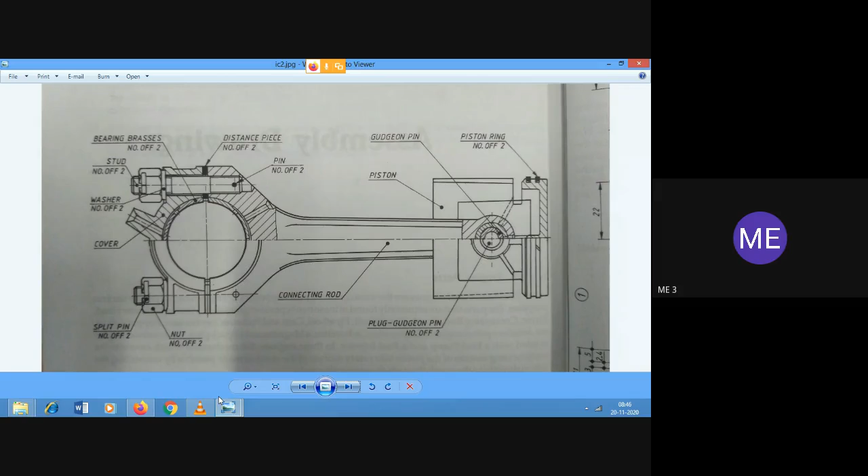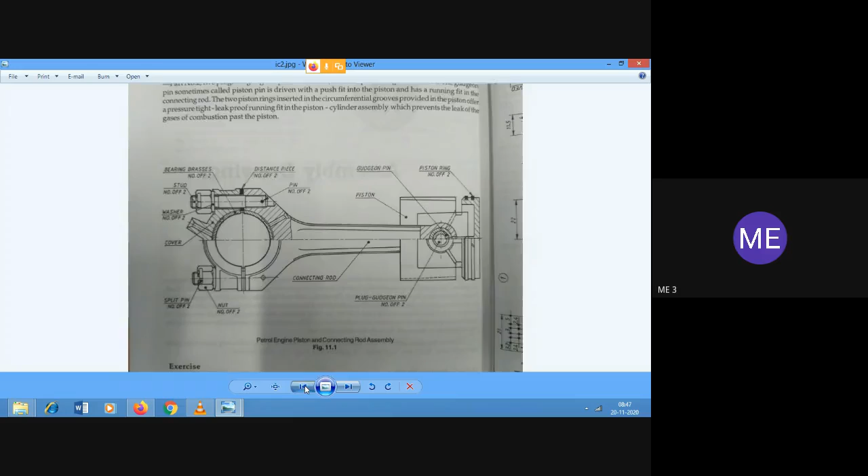So we have to make this entire assembly of the connecting rod. Now we'll see the parts and their details. These part details will be given even in the exam. And as I've already told several times, they will never give how the assembly will look. In the Part C question, the assembly drawing question, the assembled view will never be given. They will only give the details of the parts, with the bill of materials.

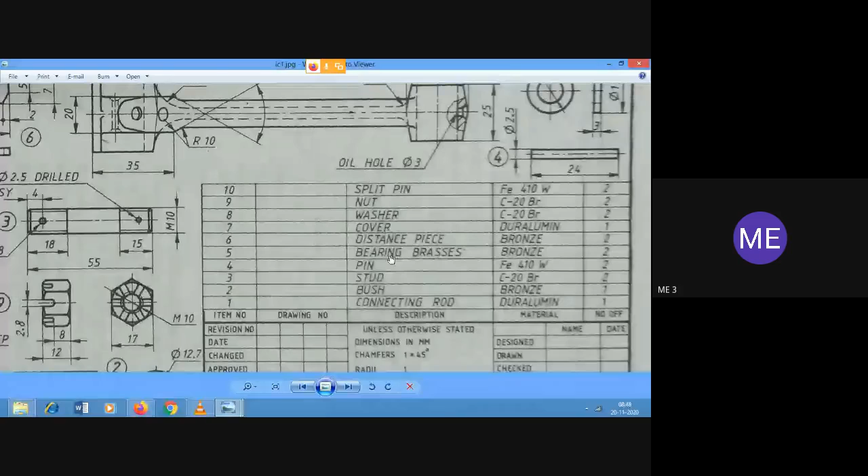Now we have a total of 10 parts here: connecting rod, bush, stud, pin, bearing brasses, then the distance piece, which fills the gap between the connecting rod and the cover, then the cover, washer, nut, split pin. The material is given in the next column, and in the last column, the number of pieces required for one assembly. So one connecting rod, one bush, two studs, two pins, two bearing brasses, and so on.

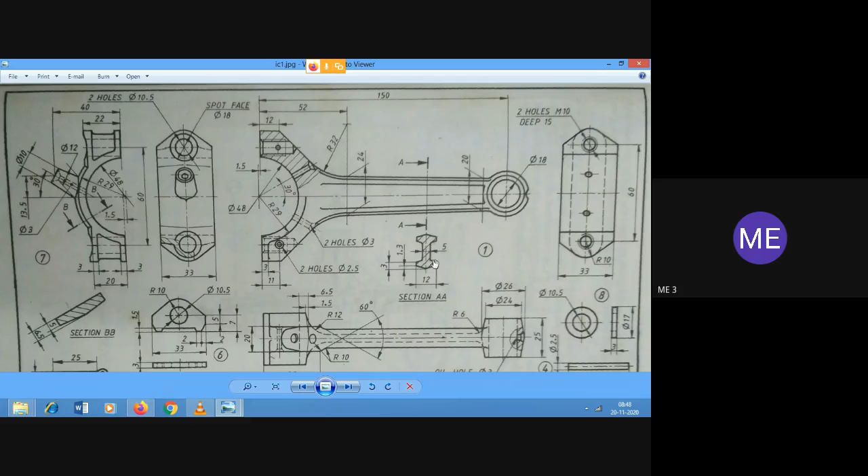So here we have the connecting rod, part number one, whose front view, sectional view and top view are given. And we have the cover on the left side, part number 7. The other part details are also given. So we'll see one by one today how to do these drawings.

Yeah. Okay. Just a second.

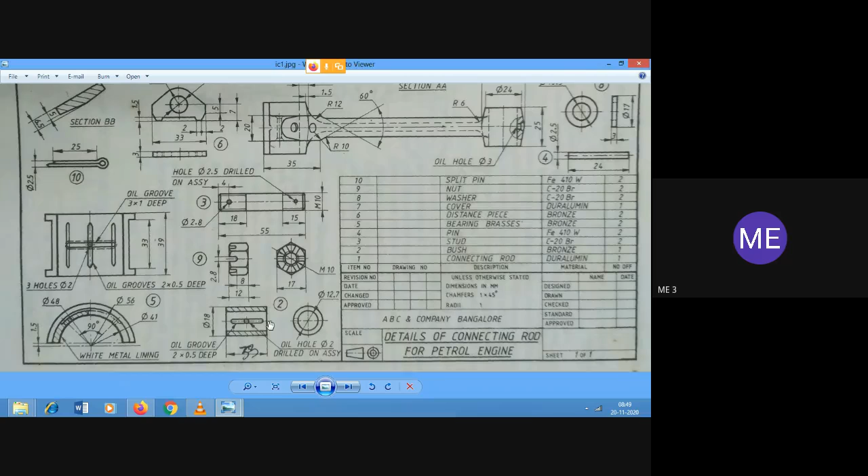Okay. So here, part number 2 is the bush. They have given a sectional view of it, with hatching on both sides. The outermost edges are indicated with diameter 18, so it's circular, and we can see some thickness for this bush. The side view is given on its right side, with inner diameter 12.7.

On the circumference there's an oil hole of diameter 2, and a groove of 2 by 0.5 deep. The overall length of this bush is 33 mm. So we will see that. Okay. Yes. Select the plane. It's better that you go with the front view plane.

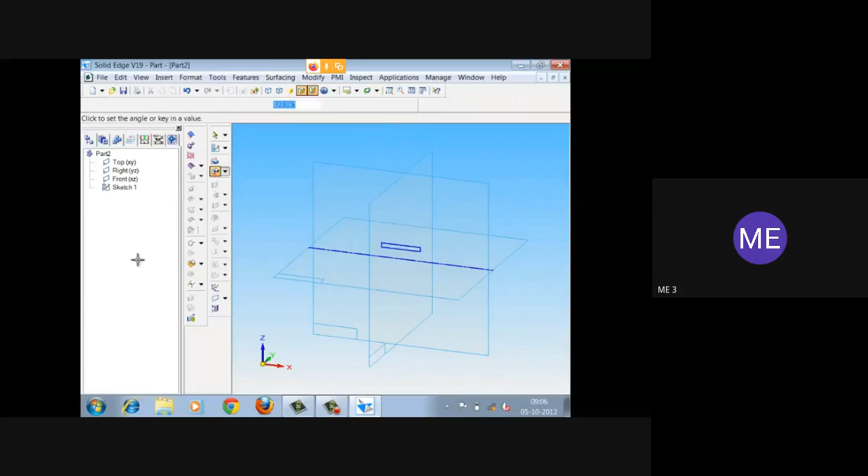So trim the unwanted lines. Now, if you look at this, the lower line has got this total distance of diameter, which was how much? 30, no, 12.7, if I'm correct. So that's the inner diameter, and over here the above line is the outer diameter. Yeah. Yes. Revolved protrusion. So we need it completely cylindrical in shape.

Right? Now we'll go for one more thing, a plane that we'll be drawing parallel to this plane of selection, that is the front view plane, because we need to give a groove onto this cylindrical surface. In one of the assembly drawings in the previous classes, I had mentioned how to do this, right? Because there also we need to use this parallel plane or offset plane, because we cannot do any kind of drawings or cutting or protrusions from a cylindrical surface directly. Okay, we have to make use of a plane.

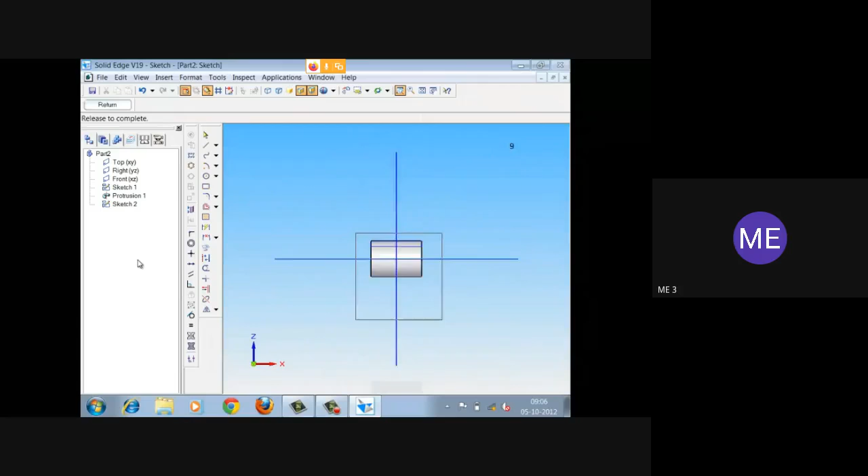So we'll keep it at 9 mm distance because the total diameter is 18 mm. So radius is 9 mm, right? So once I place a plane from here at a distance of 9 mm, then I'm at the circumference. Okay. Right. So they had given a groove of 2 mm width and 0.5 mm. Okay. 2 mm width and 0.5 mm.

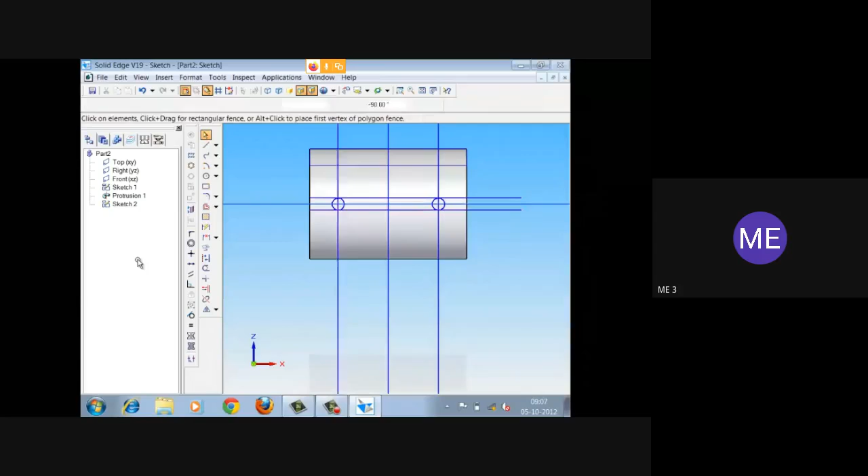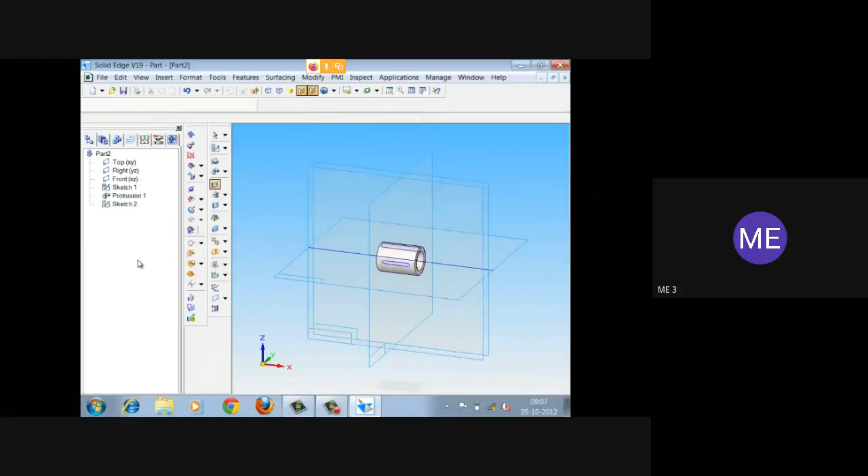So trim the unwanted lines so that we get the oil groove shape. Okay, this particular shape is what we need, and we have to go for cutout for 0.5 mm. Cutout. Select the sketch. 0.5 mm, which they have clearly given in the drawing.

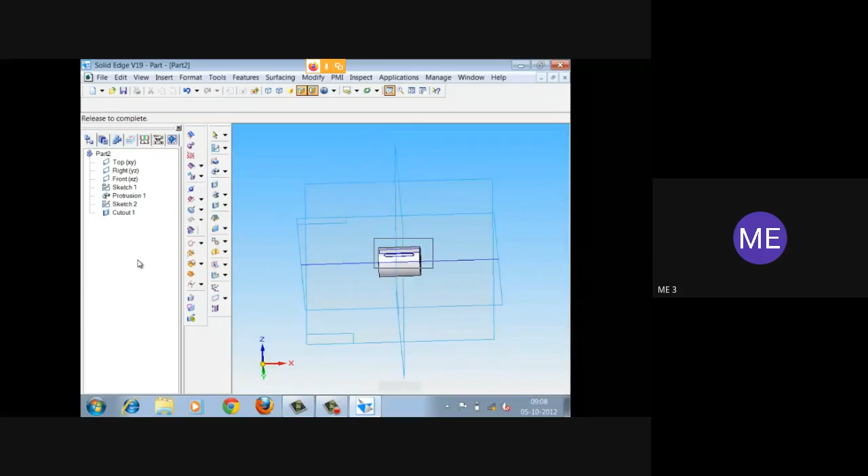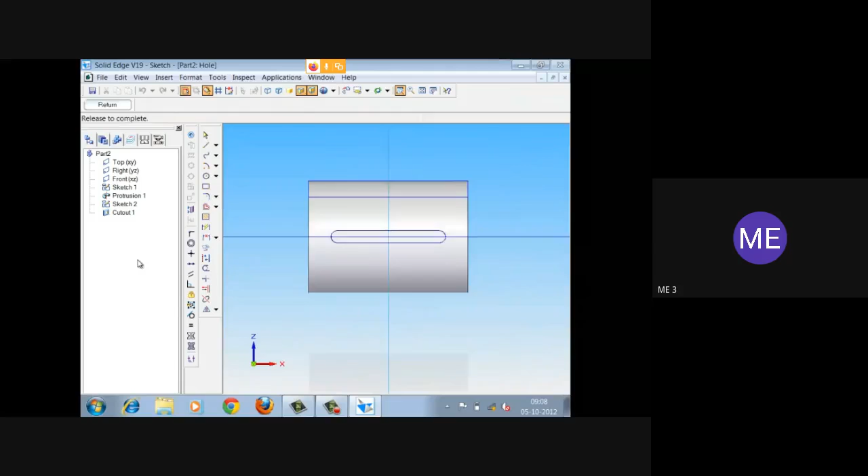We have to create a hole. Go for parallel plane. Have the plane once again at that same offset plane at 9 mm distance. It's a circular hole of 2 mm diameter. Save this drawing. Yeah.

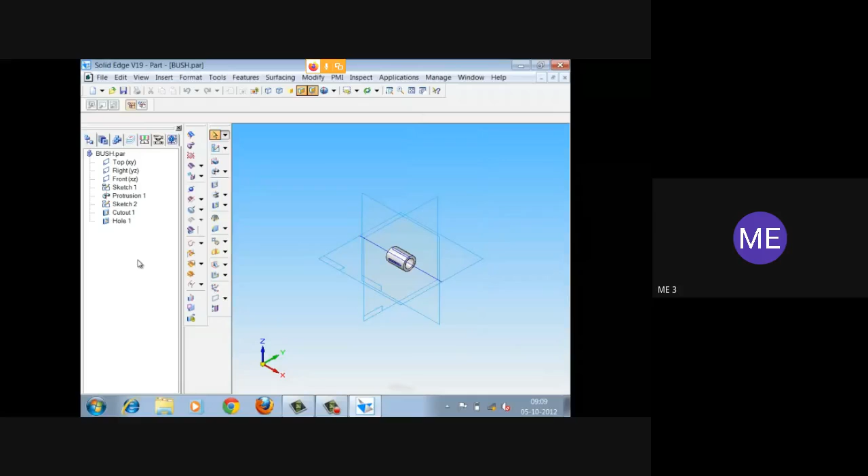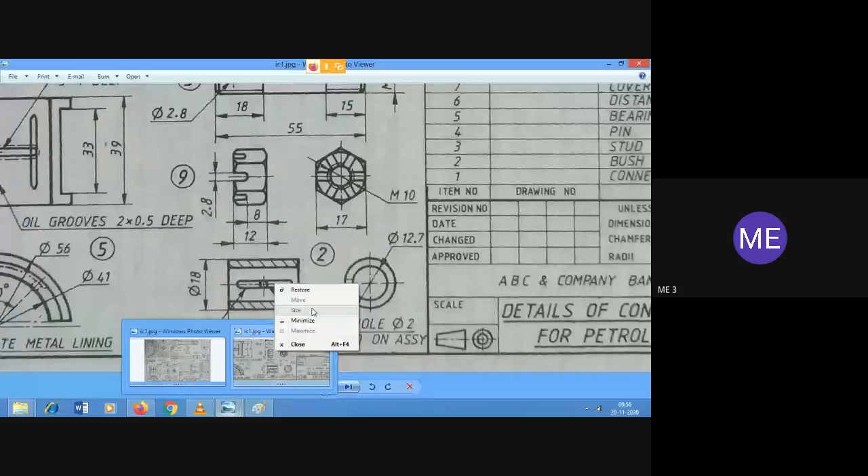And if you look at this drawing, I'll show you one more thing. So now here, just a second. Yeah. Now if you look at this drawing, there is going to be only one groove with one single oil hole, and you can see that in the side view over here. Okay, we don't have any other hidden lines in the side view. That means this particular portion is there only in one place. Okay. Right.

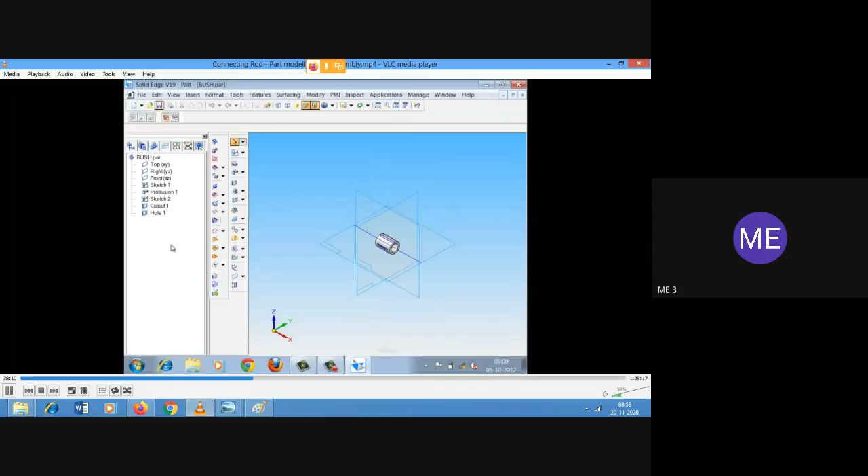So now we'll go to the next part. Okay. Which part is it going to be? Number 3, right? Which is the stud, which has got M10 thread. Okay, so length is 55. This threaded portion on one side is 15 mm, other side it is 18 mm.

Okay, there is an oil hole of diameter 2.5 on one side and another hole of 2.8. This 2.8 mm diameter hole is for the split pin to be fit. Okay, we have to put the split pin inside this hole, and this 2.5 mm diameter hole is for the oil. Okay. So anyway, it's basically a cylindrical portion. You don't have to do such a complicated one. Many methods are there.

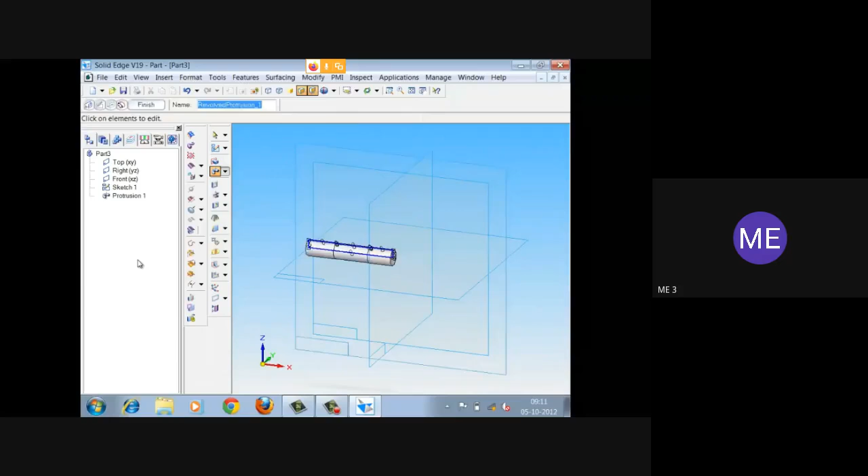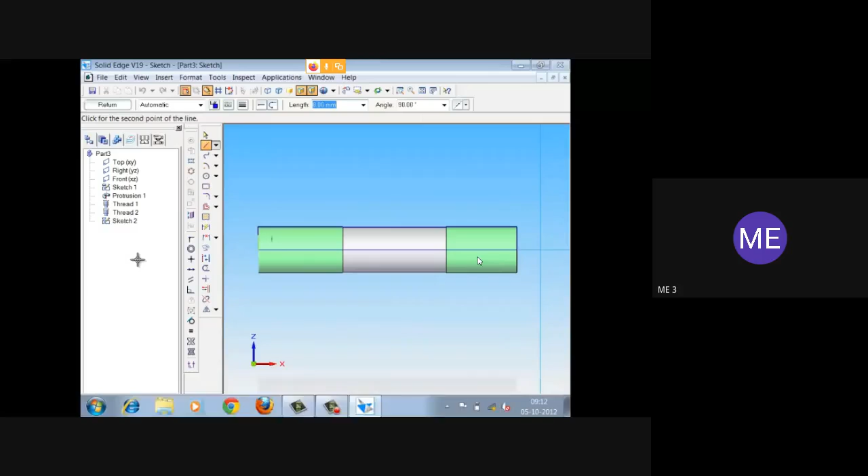Go for thread. Okay. And then here we have on one side the thread for a distance of 15 mm, and on the other side M10 thread for 18 mm.

So anyway, it has to be a through hole. So when you draw the circle directly from the center on the plane, it is going to be at the center of this cylindrical portion. So we can extend it on both the sides, which will be seen now.

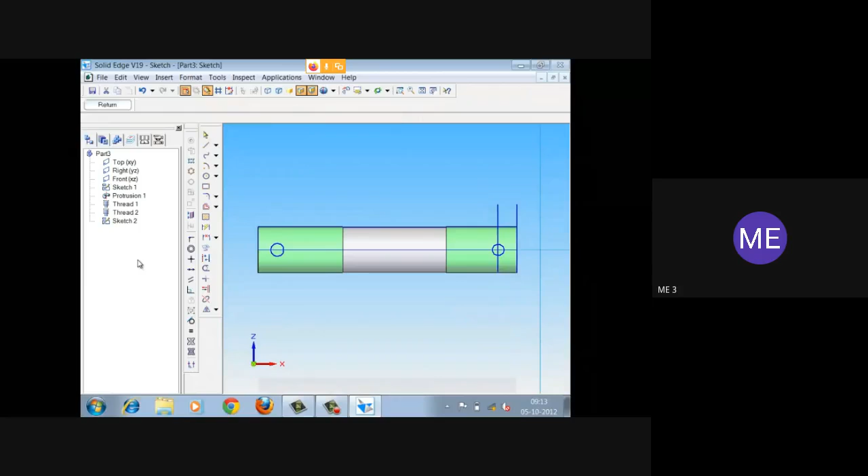So here you can see the hole is at the center, on the plane, and the circle. Now we can select both of them and go for cutout. Use symmetric extent.

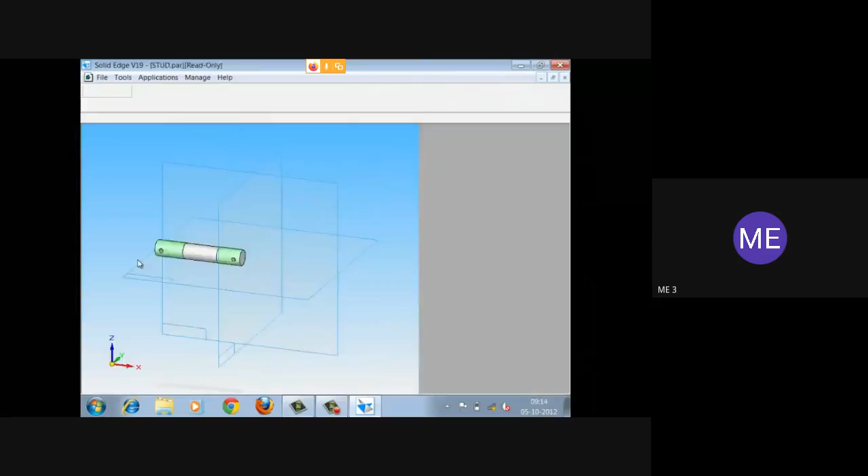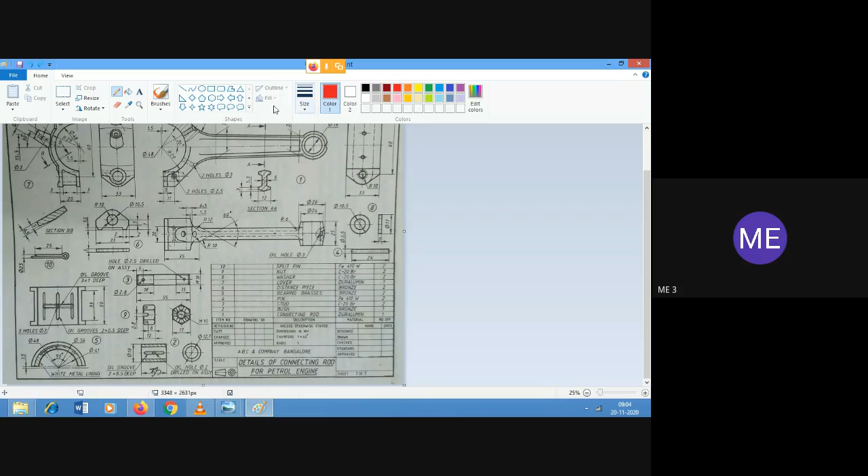Okay, so we'll go to the next part, which is part number 4, the pin. Okay. Part number 4. Yes, it is over here. It's a simple part. Here we have, okay, a cylindrical piece of 2.5 mm diameter, 24 mm. Okay.

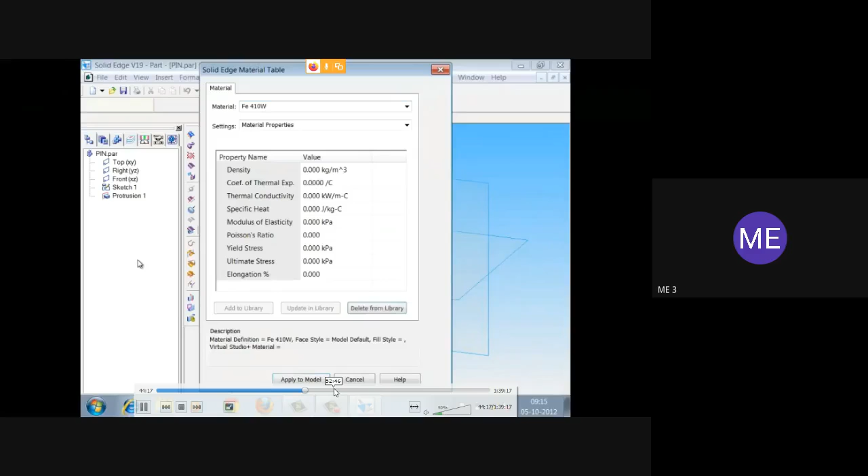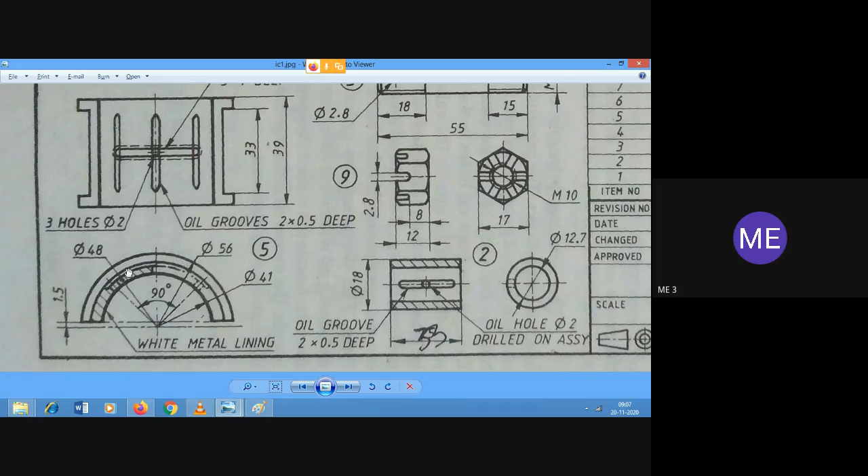The next part, part number 5, which is the bearing brass. So we have it here. Yes. Right. So it's a semicircular portion, not exactly semicircle. If you look at this drawing carefully,

if you look at this drawing carefully, the center for the semicircular portion is over here, but this bearing brass starts from a distance of 1.5 from the center line on both the sides. Okay, so it's not exactly semicircular, almost semicircular. Okay.

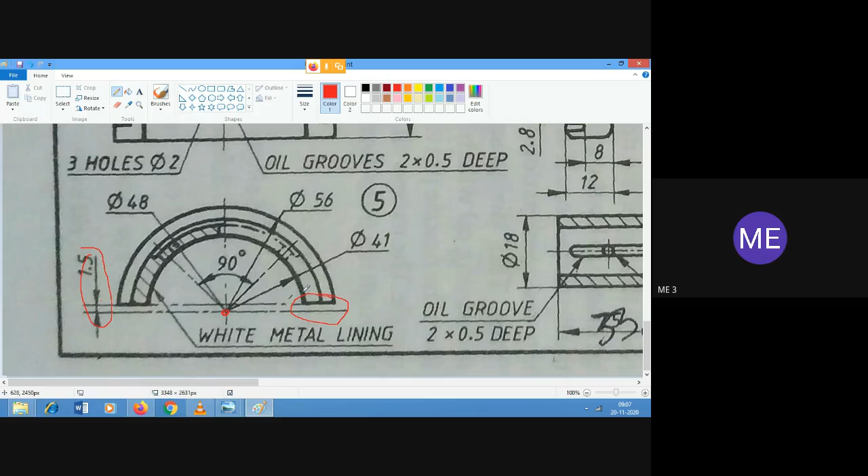And it's got the outer diameter 56, then inner diameter at 48, and then one more at 41, right? And there are certain groovings also, for which it looks like this. If you look at the other view of this brass, it is going to look like this. So it's got a total width of 39, and this particular line is for 33 mm. Okay, and there are groovings for this. So that is what has been shown over here in sectional view, how they look like.

Okay, and there's an oil hole. Two oil holes are there, sorry, three holes of diameter 2, and there's an oil groove of 2 into 0.5 mm deep. So the width is 2 mm, and 0.5 mm deep, right?

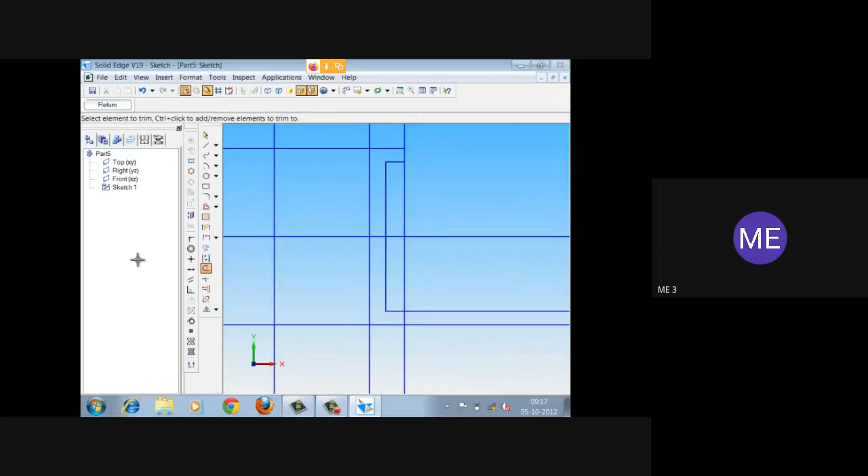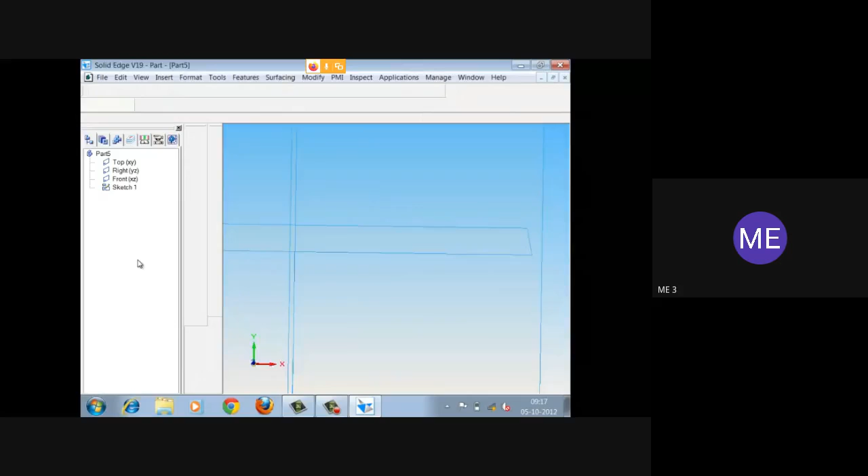To get this particular shape, it is not always required that we have to draw only in this method, right? We can also do it in a much simpler method. Anyway, we know the overall length of the line, which is 39 mm, and then the shorter line for 33 mm, right? And its distance also we know. Let's now go for revolve protrusion. Yes, this is that 48 mm diameter line.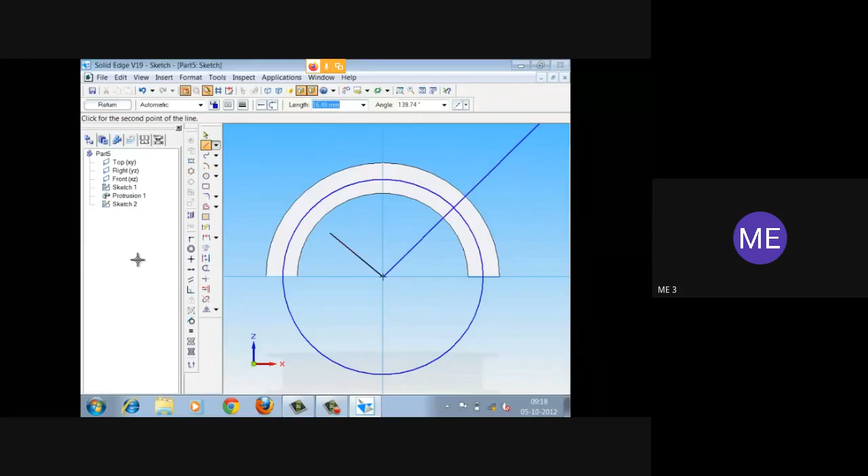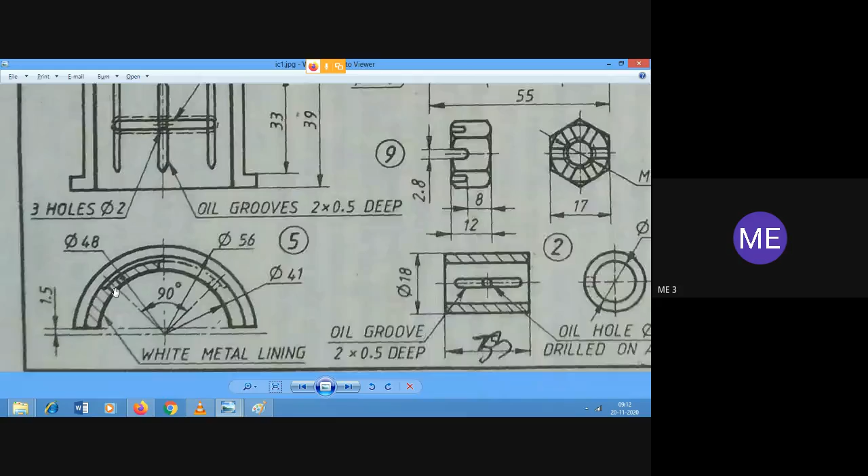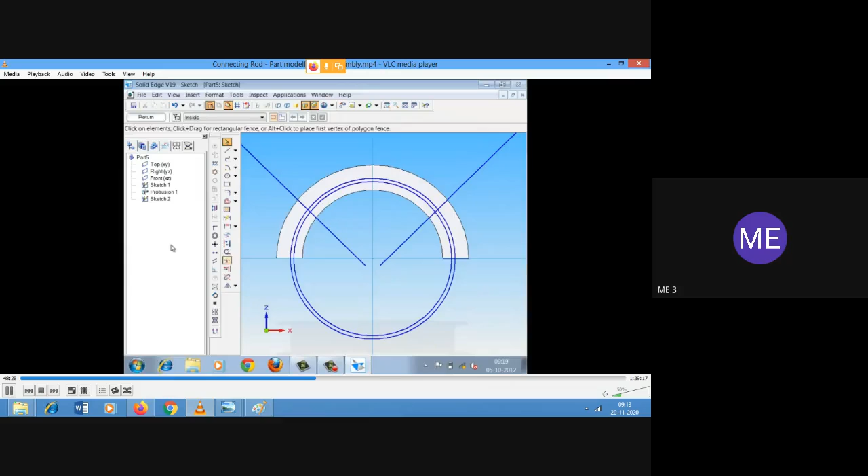So there is another thing that they've given. Here, look at the drawing carefully. They've given 90 degrees, and with that, there is this oil groove that has to be done. Okay, so that is why they're drawing these two lines, which look like a V shape. Okay. So this is going to be done to form those circular grooves.

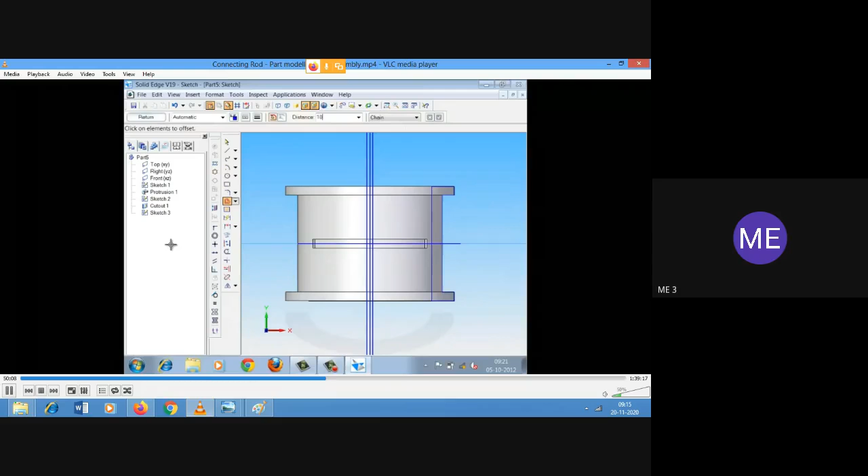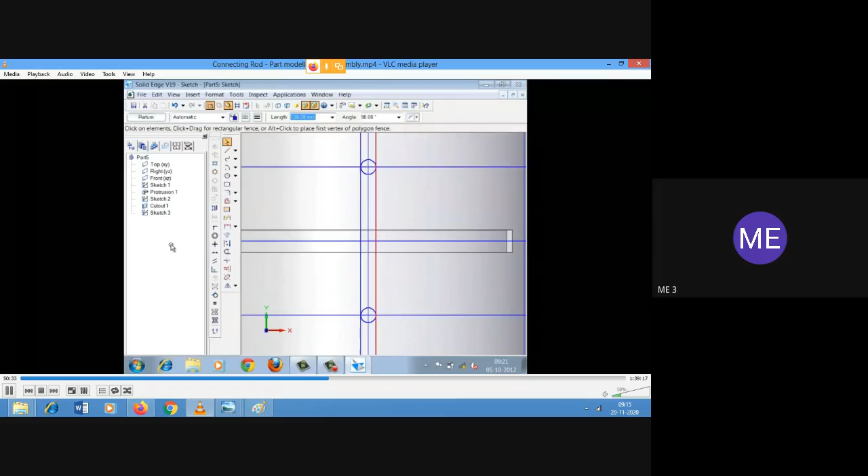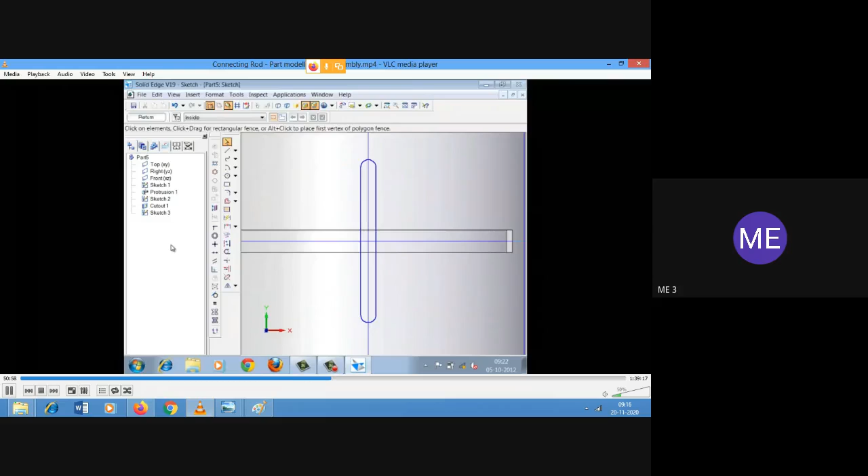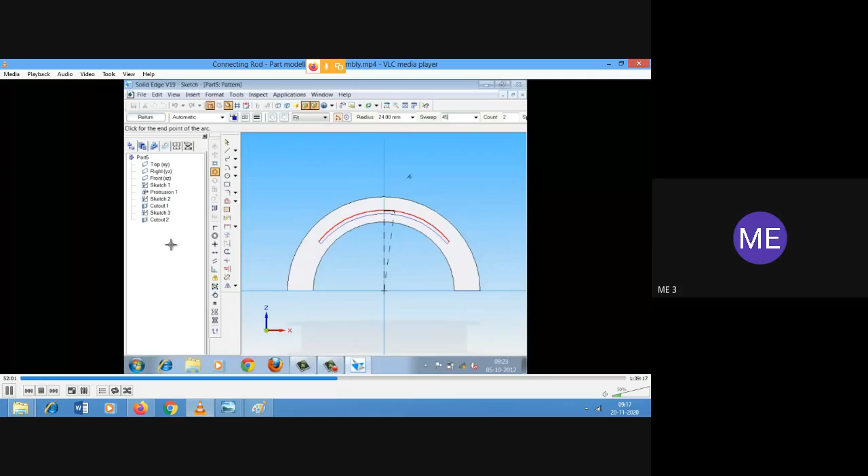This is for the groove that has to be formed, which has to be perpendicular to the already formed one. So instead of making it once again onto this curved surface, you make use of pattern and rotate it so that we get the groove at the required location.

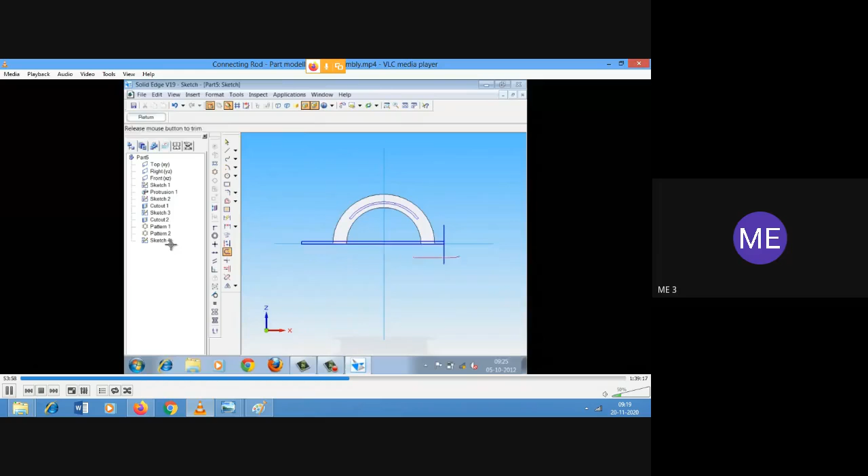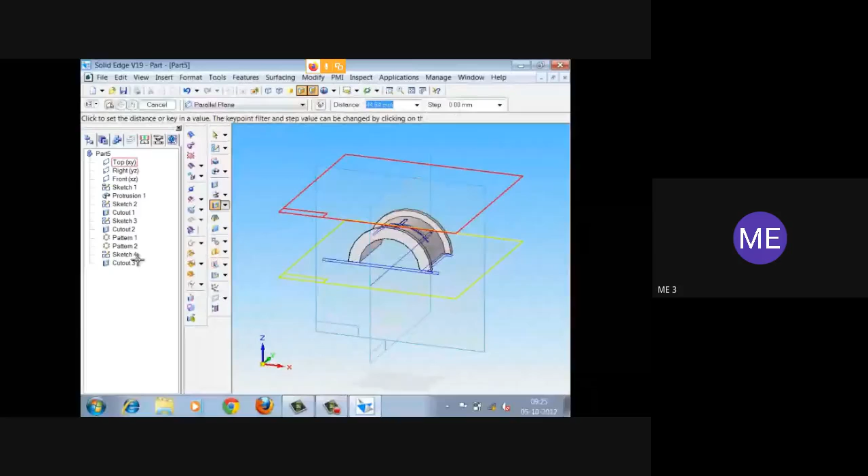Yes, now they are doing that 1.5 mm distance from the center of this arc. It should be cut throughout. Okay. There has to be an oil hole.

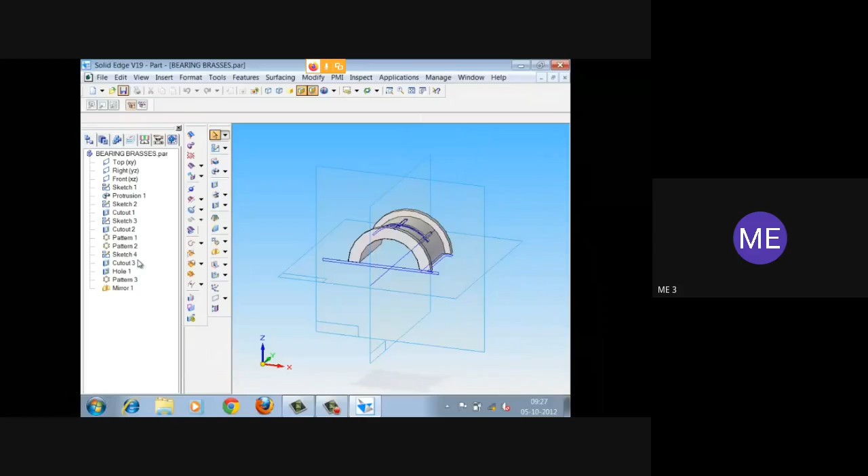Right. So here, next we'll go to part number 6. That is the distance piece, which is over here. So it's got this particular shape. Overall length is 33 mm. Okay, and we have to draw this. Thickness is 3 mm. Right, and if you look at it, just a second. This section BB. Okay, it's not for that. All right. They've given only the front and top view for this. Right.

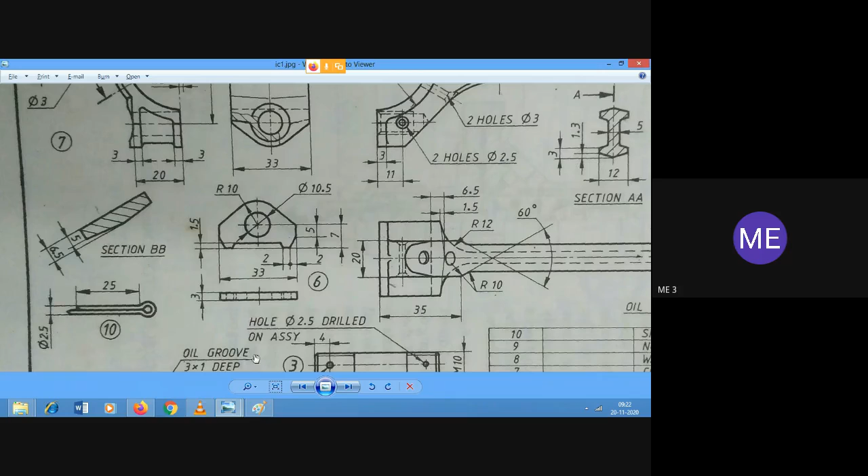Just a second. Right. Okay. All right. So now we'll go with the next part. That is, as I just showed you, the distance piece. Okay. So we'll select the front view plane only.

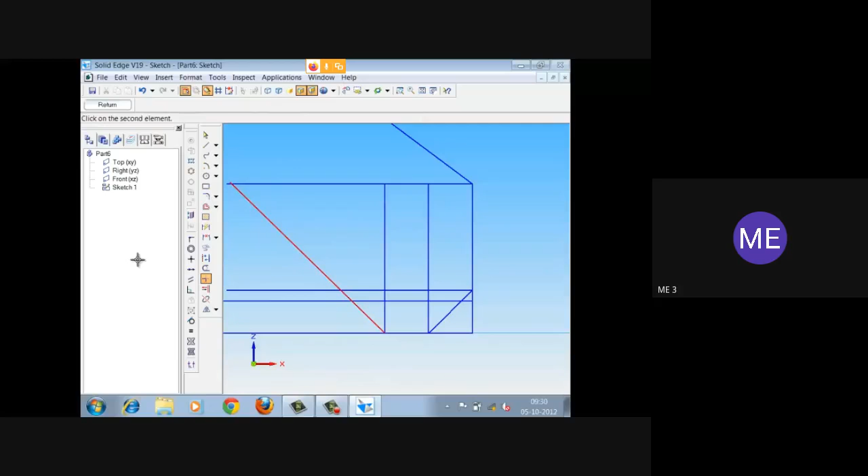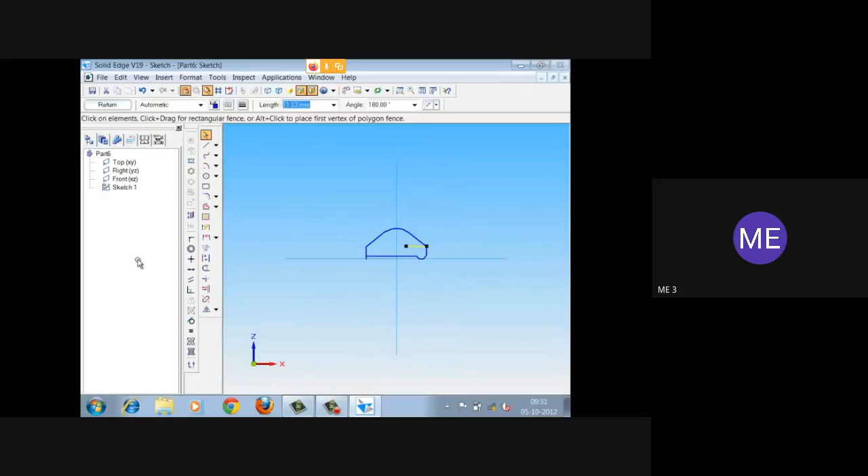Now trim these unwanted lines to get the required shape. They have done everything only by drawing parallel lines and offset methods, and then trimming off the unwanted lines to get the required shape. But it is not necessary that we have to do it only by this method. Yes, what has been done on this right side can be mirrored onto the left side, and only a small portion can be trimmed now.

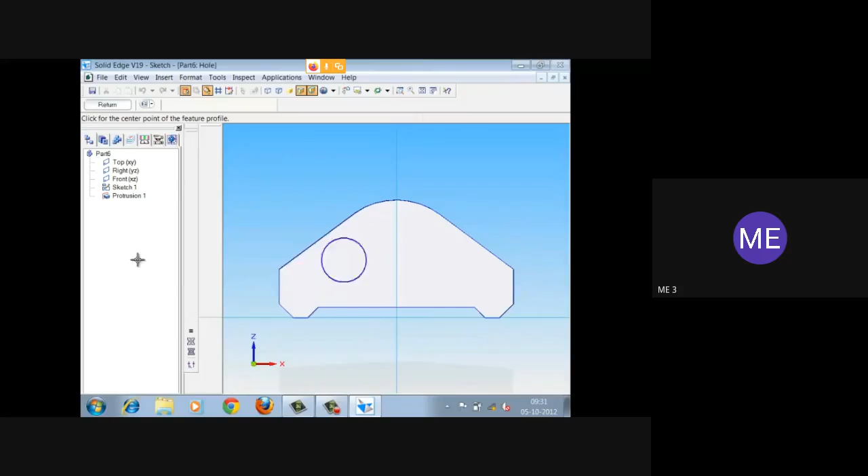Right, so protrude it for a thickness of 3 mm, symmetrically extend it. There is a hole of diameter 10.5 mm at the center of this.

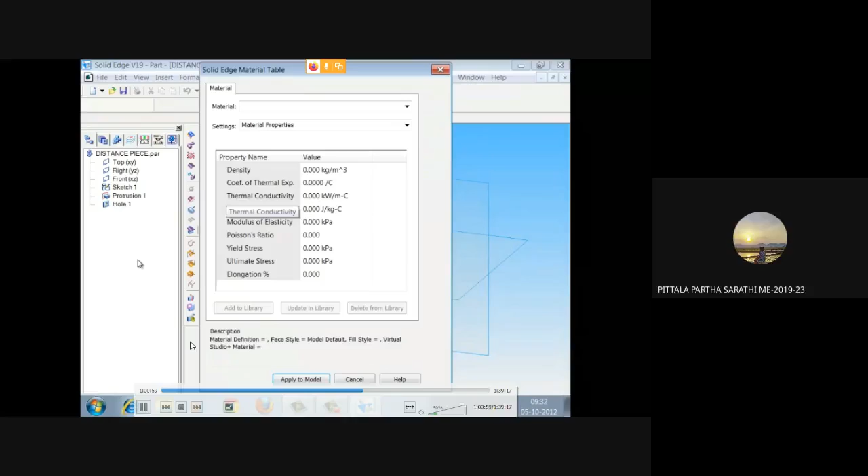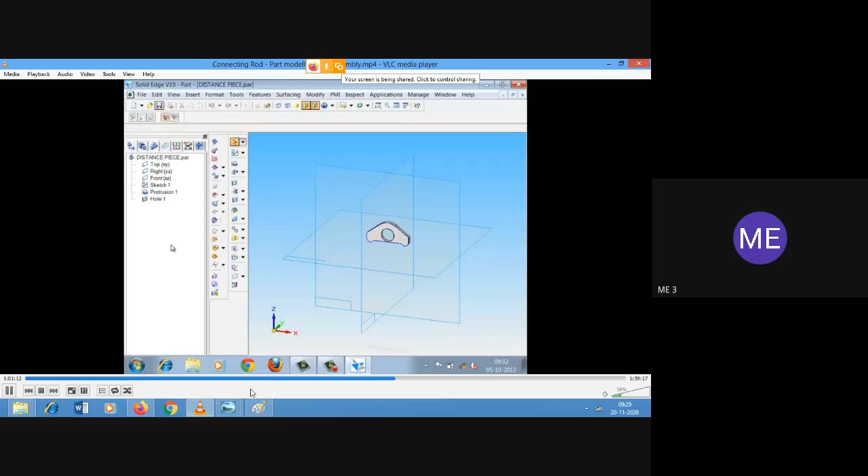Sir, radius how much, sir? Radius is 10 mm, they've given it over here. Sir, then diameter should be 20, no, sir? One second. Sorry, diameter is 10.5, not that, sorry. Sorry, I made a mistake. I just misread it. So this is a diameter of 10.5. Okay, right. So this radius is 10. Yeah.

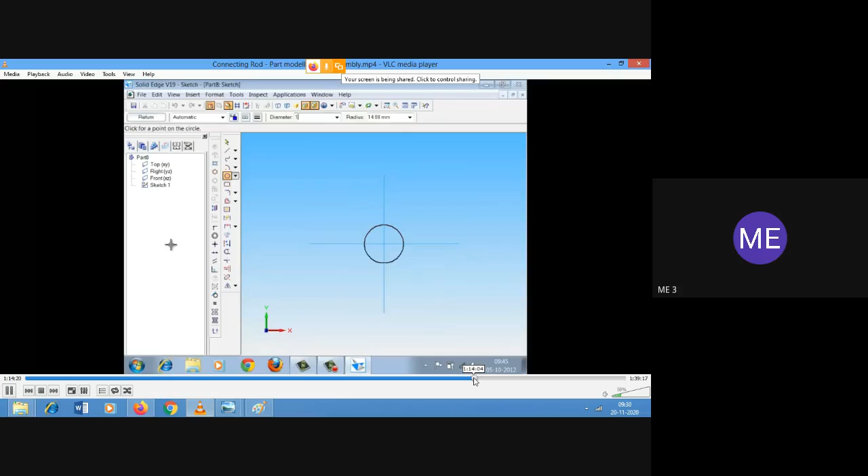Okay. So after this distance piece, the cover portion is a complicated one. The IC connecting rod and cover portion we'll see later on. Okay. Then is the washer. It's a washer. The diameter of that part number 8 is over here. Yeah. Outer diameter is 17, inner diameter is 10.5, thickness of that is 3 mm.

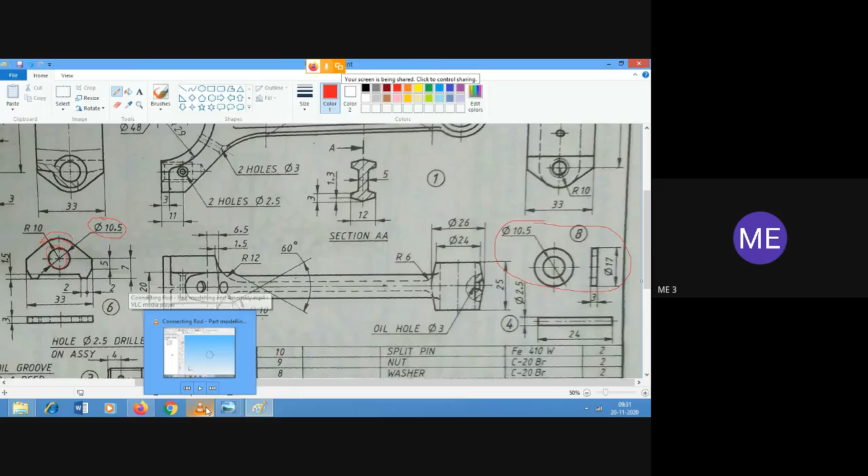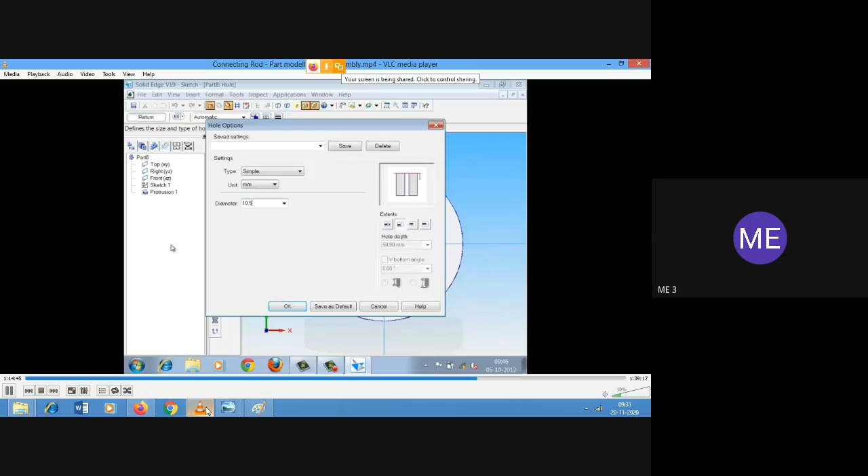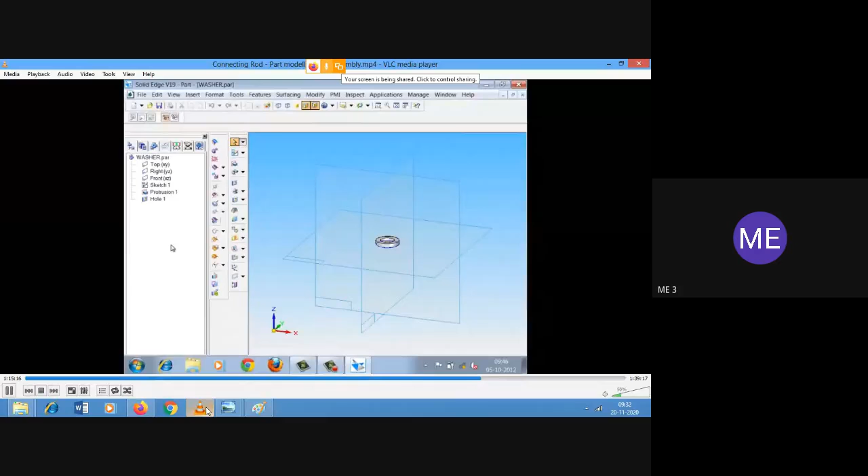So we can draw two concentric circles and we can just protrude it once for all. You do not have to go in for two operations like protrude it and then cut out and so on. Yes. So that's about the washer.

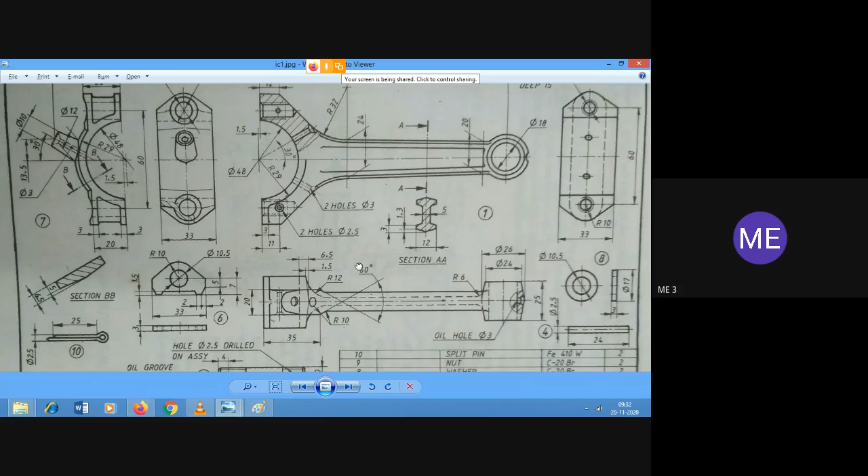And then 9 is a nut, which we all know how to do. Yeah. And the split pin is there. That's also a simpler part. It's over here, part number 10. And so almost all the parts of the connecting rod will be done. And then there will be two major portions, that is the connecting rod and the cover for the connecting rod, which is a complicated one. Okay, we'll do that. Now practice these drawings. Okay, practice these drawings, right?